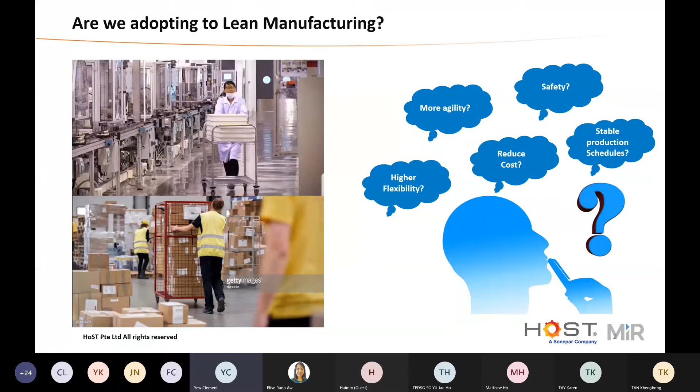And then we come into Industrial 4.0. We always talk about autonomous systems, collaborative systems where humans and robots or machines can coexist in the same workplace together, and coexist safely. Then also how flexible it can be, and add on to that is connectivity, because of all the data required to analyze how to better a process to make it more efficient, and thus the productivity increases.

For humans, what kind of data can be collected? Actually, to me, it's really minimum or nothing.

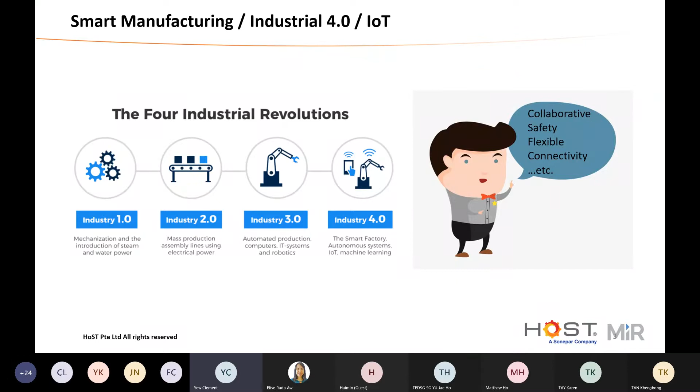Then comes the new norm. Because of the COVID situation, a lot of processes need to be changed. I can correlate these to some terminology used in Industrial 4.0. For example, autonomous system means less or no labor, no humans around. So it actually cultivates an environment where there is lesser kind of infection. And in cases where there are some processes that humans need to be involved, can we use a robot for certain processes in between so it becomes collaborative, and this also ensures some social distancing between humans?

Safety wise, using machines or robots in between also increases safety for the workforce, so that infection risk is brought to a very minimum probability.

Data analytics: if we go to any shopping mall, you need to do a safe entry. Similarly, by using robots or machines, data is collected and you're able to analyze this data as well. In terms of flexibility and scalability, a robot can be very flexible and scalable too.

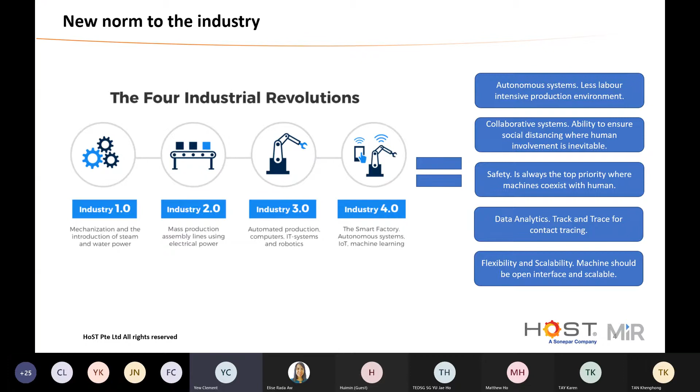That comes to why the topic of a better way, because for MiR, we are actually the world's leader in producing the safest and most reliable autonomous mobile robot. We focus on developing this robot in terms of collaboration and adaptability, because we don't want users to change their environment or infrastructure too much to use the robots. That doesn't make a lot of sense to us. And of course, performance as well, because performance is always the key indicator of whether the robot is justifiable or not.

Quick show: MiR 100, MiR 200, MiR 250, MiR 500, and MiR 1000. It has a payload ranging from 100 kilogram all the way to 1,000 kilogram. These are the members of the AMR MiR family.

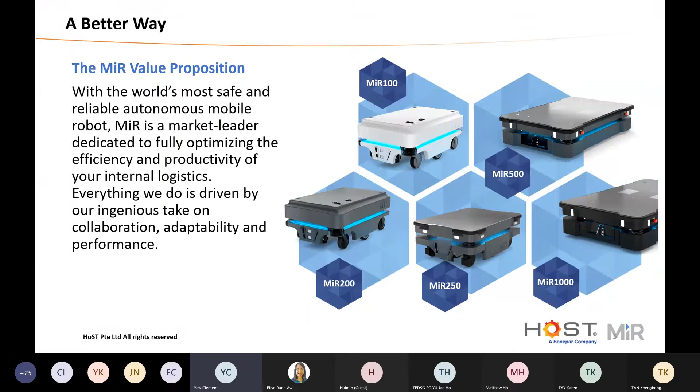A lot of people use the term AGV, Automatic Guided Vehicle. So what's the difference between AGV compared to AMR? An AGV is typically an older kind of technology which requires tracks such as magnetic strips on the floor or wires to guide the vehicle along. But for AMR, which MiR has developed, effectively we don't need any of these magnetic strips on the floor or wires.

For AGV, you will stop at any obstacle without the possibility to change the route, so you really need to remove the obstacle, otherwise you'll just get stuck there. Whereas for AMR, it's able to safely travel around people and obstacles and reach the destination required. It's also easier to expand AMR compared to AGV, because with AGV, if you want to change the route or expand, you probably need to physically change the magnetic line, which creates changes to your work environment. AMR doesn't need that. AMR is more flexible and navigates dynamically while planning its own path, whereas AGV is very restricted to what's on the floor, and very controlled as well.

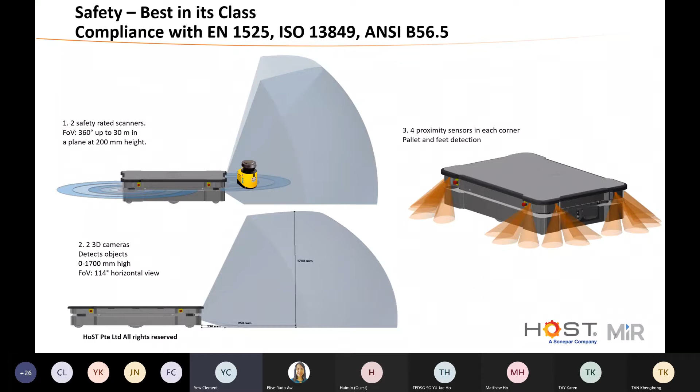But for MiR, we actually have solutions to that. We're able to build a conveyor to transport all these cassette boxes, and we're also able to integrate a robotic arm on top of our MiR for such processes as well.

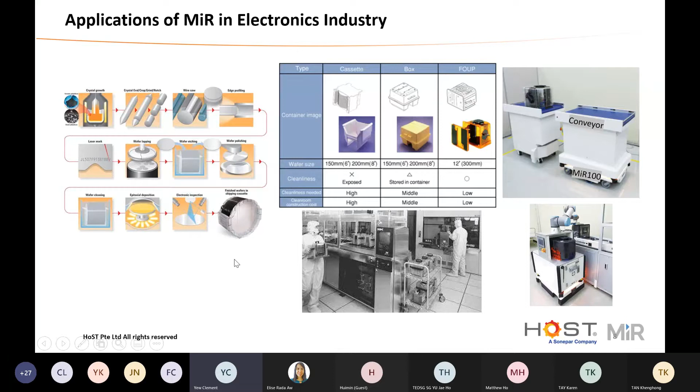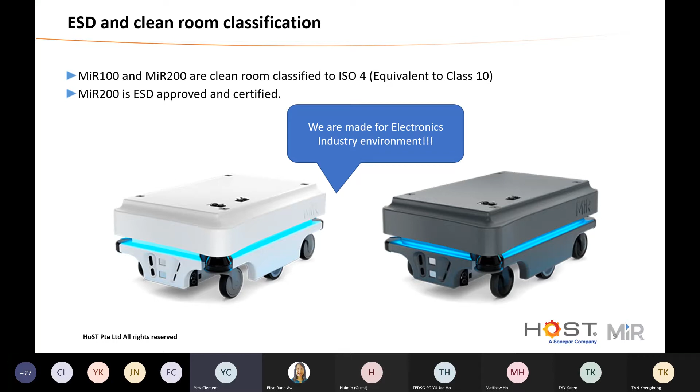For our MiR, we also know that for the electronics industry there are some requirements for the environment. So not to fear - MiR 100 and MiR 200 are actually clean room classified to ISO 4, which is equivalent to class 10. Our MiR 200, the gray one, is also ESD approved and certified. So essentially, these two models are really made for the electronic industry environment.

I'd just like to show you how the MiR works in a typical production environment. Please enjoy the video.

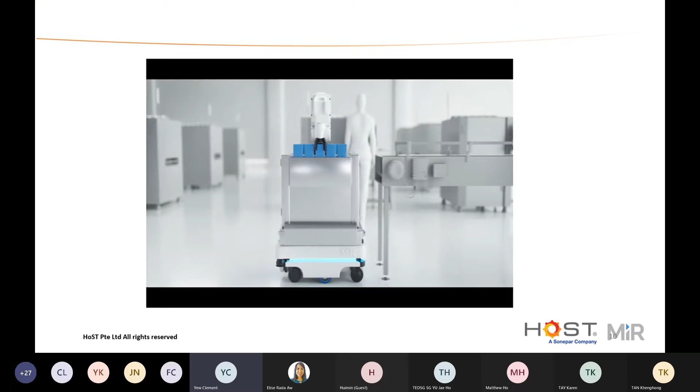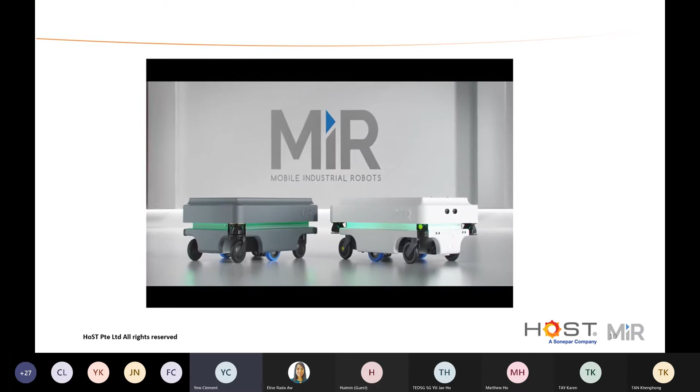Imagine a fleet of collaborative mobile robots that could optimize your workflow, increase productivity, and reduce costs. What if it was 100% automated and could collaborate with employees? And what if it was fast and easy to integrate into any type of factory layout? Sounds like something from the future, right? Actually, it isn't. Let me introduce you to Mobile Industrial Robots, MiR, an efficient and flexible mobile industrial robot solution.

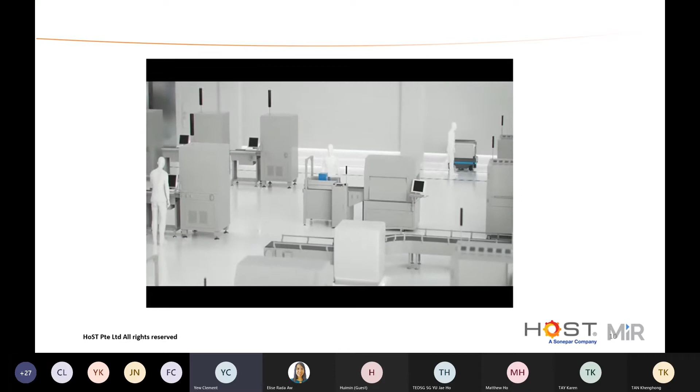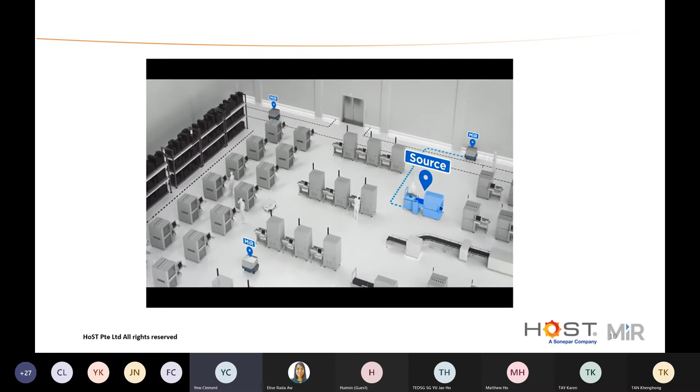So how exactly does the MiR fleet work? Let's have a look. An employee would like to send the item he's just finished working on to the next production line. With the press of a button, a MiR robot is summoned. A signal is sent to the MiR fleet management software, which runs behind the scenes and manages all the MiR robots. The system automatically instructs the appropriate robot to navigate to the source point.

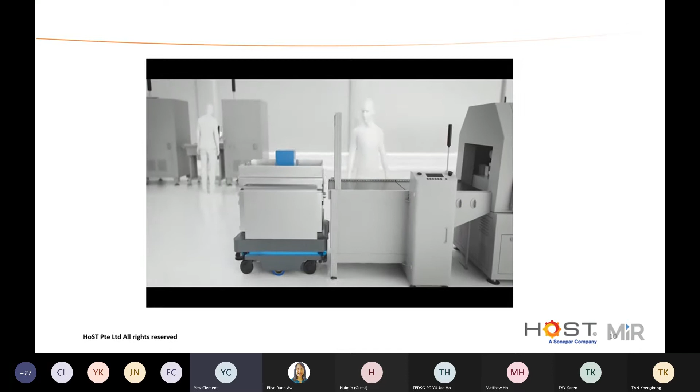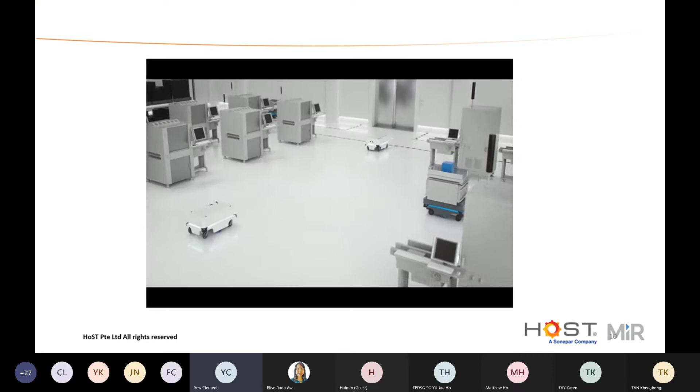The item is placed on the robot and is ready for transit to its destination. The robot drives 100% autonomously and can easily navigate around obstacles on its way. The fleet management software automatically adjusts traffic in real time, ensuring that everything runs smoothly and efficiently.

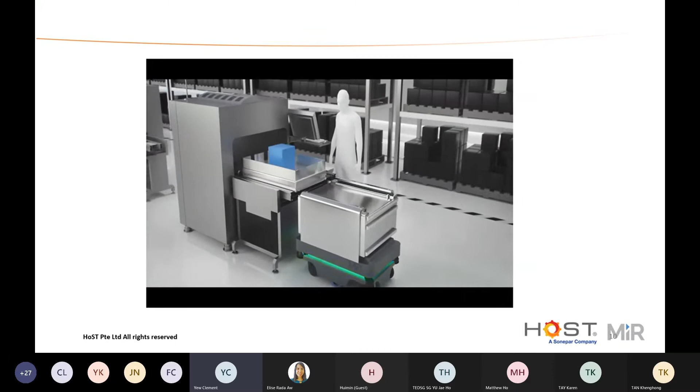Now the robot has delivered the item to its destination. If there's nothing else in the queue, the robot can be set up to automatically park in a preset parking spot and recharge. The robots can also be summoned via tablet, automatic communication from production lines, or via your ERP system. You even have the possibility to create rush orders that are placed in front of the order queue.

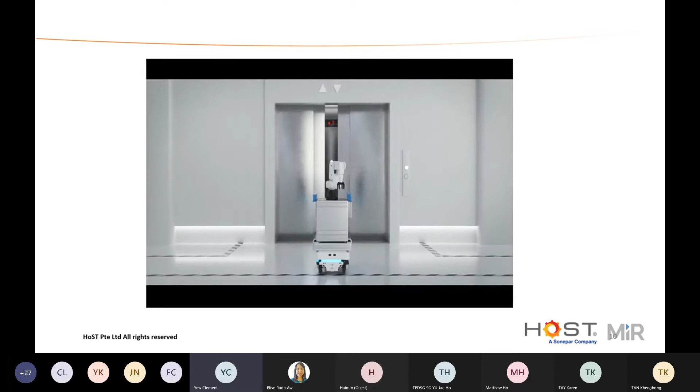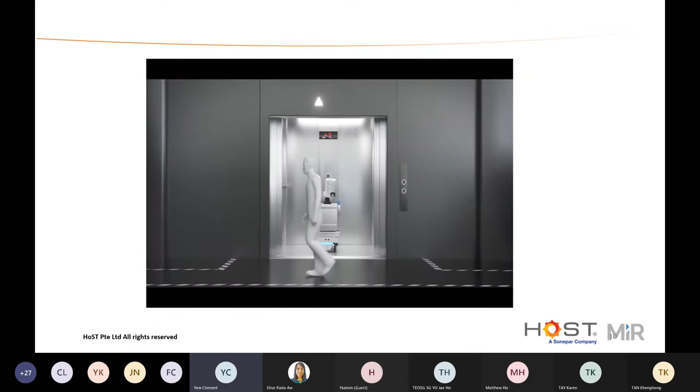Because the robots drive autonomously, they can perform complex maneuvers, such as navigating across multiple floors. If a robot encounters an obstacle that it can't navigate around, a notification is automatically sent to the user that an action is required.

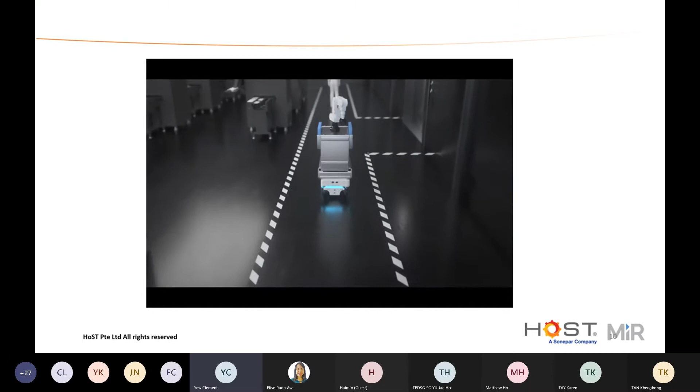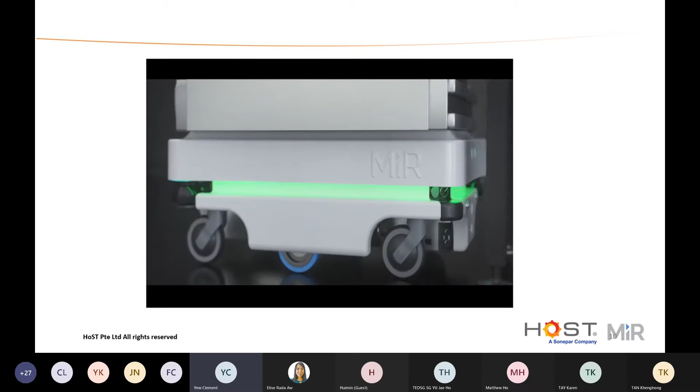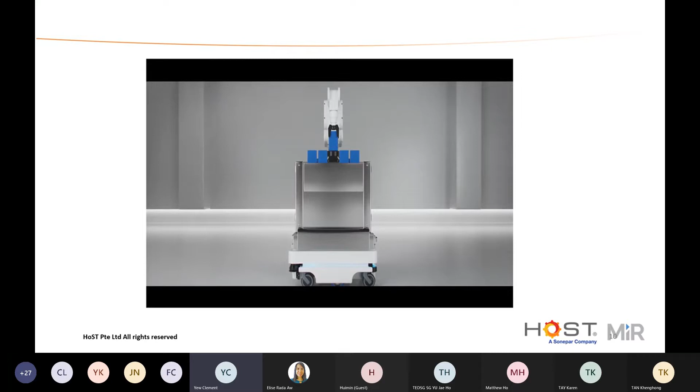When the item has reached its destination, the robot automatically sends a notification. The top modules are easy to change, so the robot can be redeployed for different tasks, whether transporting small, medium, or large items. We've got the solution to automate your internal transportation and logistics.

Programming the MiR robots is simple. The user-friendly and intuitive interface allows for fast and hassle-free implementation. And you get customizable dashboards that make it easy for you to tailor the interface to your individual needs.

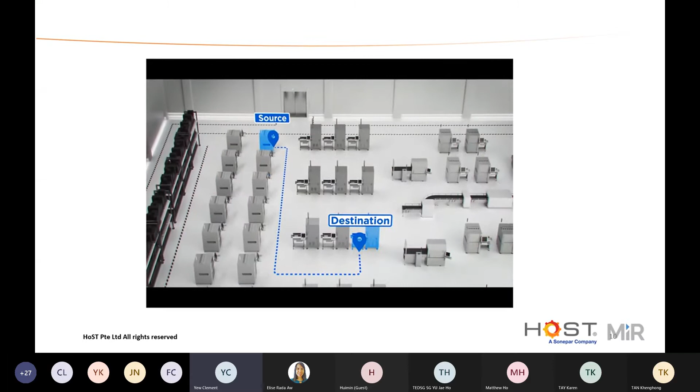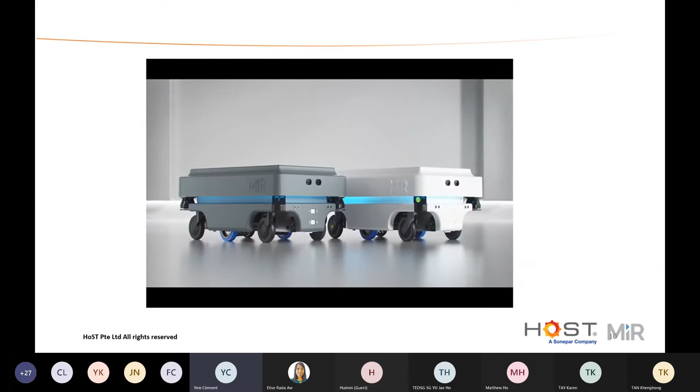At MiR, we know that factory layouts change rapidly. That's why we made it easy to reprogram routes. A few clicks and you're ready to go. It's that simple. MiR is one of the fastest growing companies in collaborative robotics. Our solutions are used all around the world and are helping companies to increase productivity, profitability, and to streamline workflows. Contact us today to learn more about how we can help automate your factory layout. MiR Robots.

Okay, so there's only so much we can show in terms of the animation. But to be honest, to date, we have tons and tons of applications under our belt. Flexibility is what we are really focusing on. As you can see, we can have multiple kinds of top modules built on top of our robots. We also have accessories like hooks for towing all the trolleys required, robotic arms as you have seen just now in the animation. We can also build basic shelves, conveyors, and pallets. So really, from a solution viewpoint, the sky is the limit.

Whatever is really what you required, and we can always discuss the solution behind it.

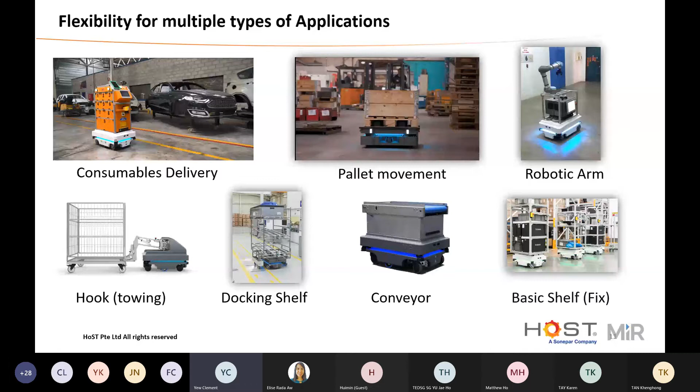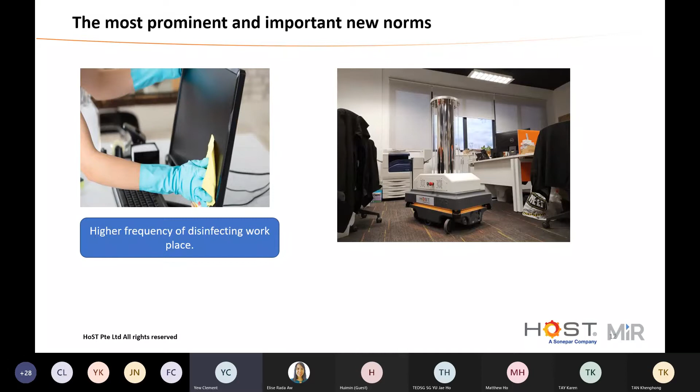And of course, the new norm also brings about disinfection. So now, in the workplace and in commercial spaces, a lot of disinfection work has been conducted. It requires a lot of labor because the frequency of disinfecting the place is getting very high. So therefore, MiR together with Host actually developed this solution. The disinfection robot is a UVC unit built on top of the AMR, so effectively this AMR can be programmed to disinfect your commercial space or workspace.

Animation is nice to see, but is it really workable in real life? We have several testimonies that I'd like to share with you guys via this video. Please enjoy.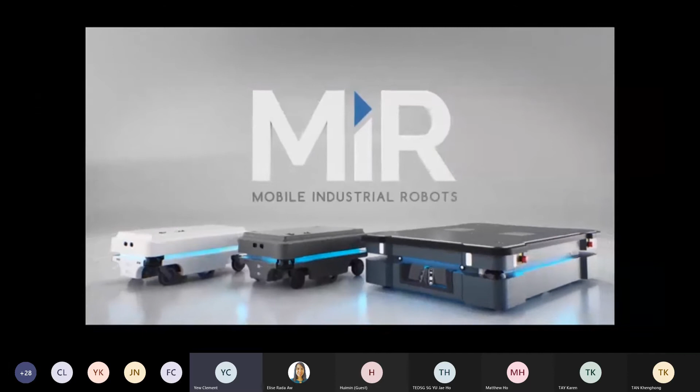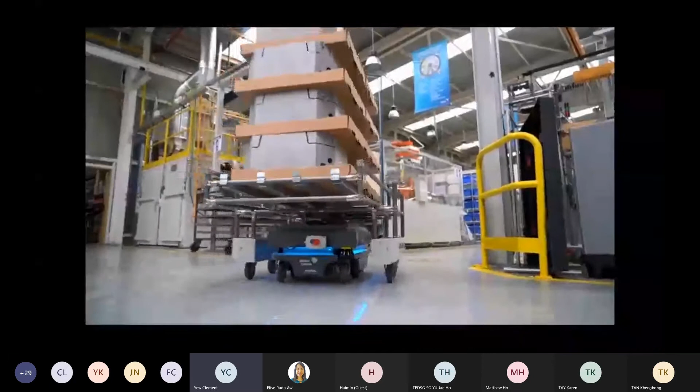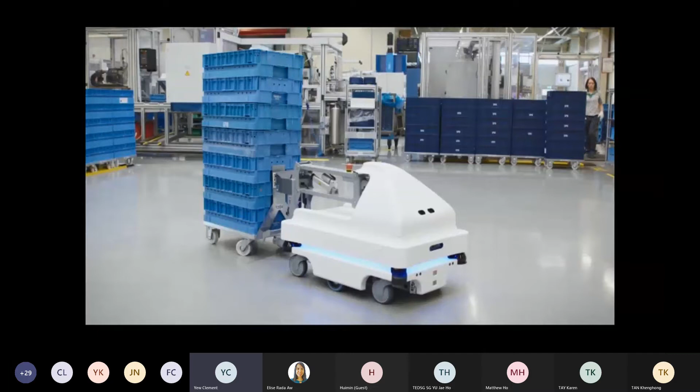The use of mobile robots enables us to implement these optimizations in order to improve our efficiency, productivity, and safety. Our MiR robot automates the transport of raw materials to one of our latest assembly lines. So we came across the mobile robots from Mobile Industrial Robots. They immediately convinced us with their great flexibility. Since then, Nidec APM has deployed 3 MiR100 robots. They autonomously transport material and empty containers between warehouse and assembly.

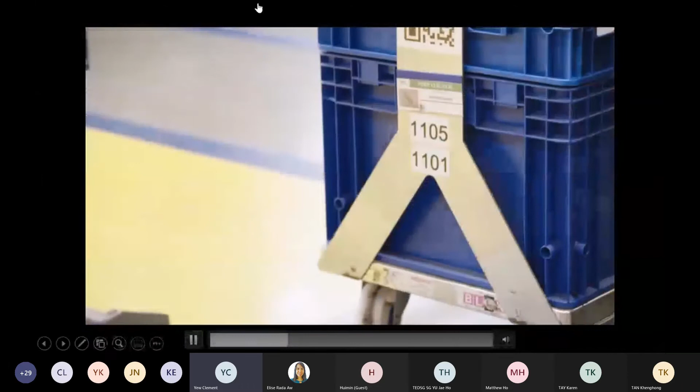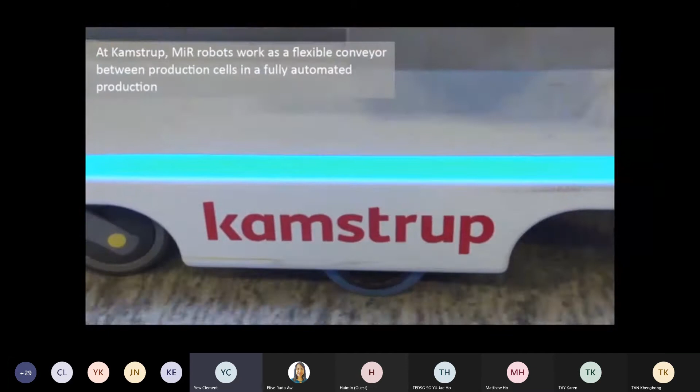We use MiR as a conveyor belt. We use it to transport our semi-finished products and our finished goods from production cell to production cell and from line to line. There are no people involved in producing the high-volume products. This means we are very dependent on the MiR being able to deliver items to a robot, which in turn can deliver items to the MiR.

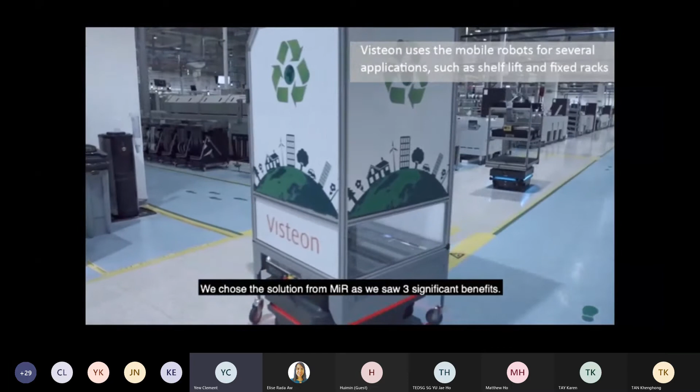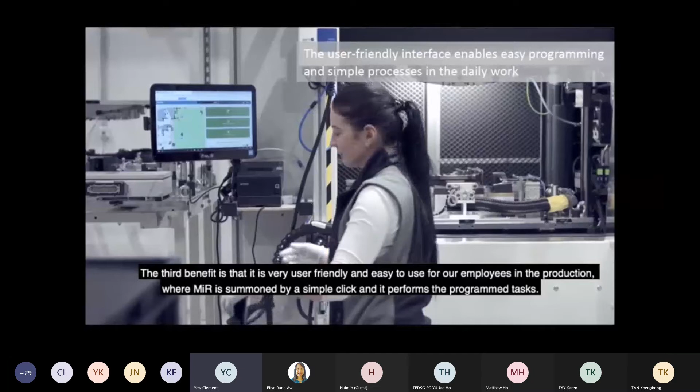We chose the solution from MiR as we saw three significant benefits. First of all, because of its high flexibility, the robots can be used in various production processes. Another benefit is the programming, which is easy and intuitive. This means we don't need a specially trained expert to use it. It can be managed by a regular employee. The third benefit is that it's very user-friendly and easy to use for our employees in production, where MiR is summoned by a simple click and it performs the programmed tasks.

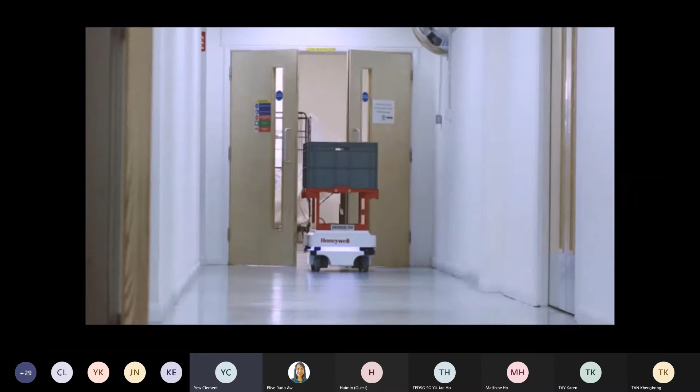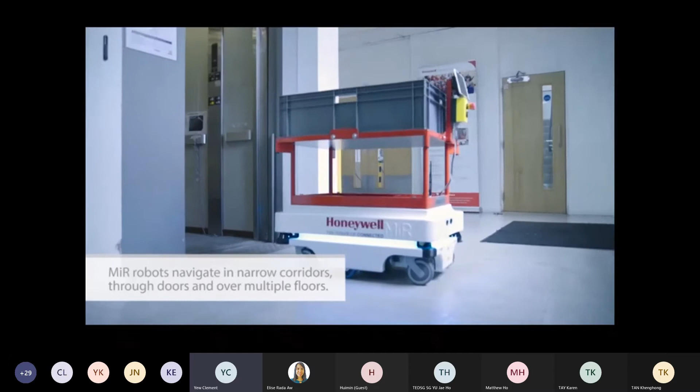It's really important for us to be able to have the robots automatically open the doors, which was done by a Bluetooth interface. We also needed to get the robots to be able to use the lift, so fleet controller and having the robots automatically control the lift was a really big thing for us.

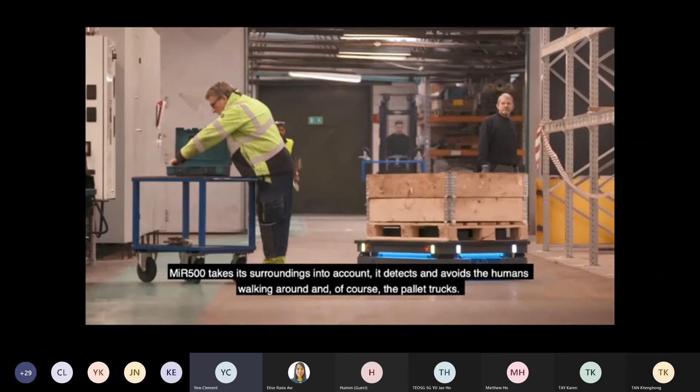It gives me an easier workday. And when talking safety, it is much more safe having the MiR500 drive instead of having me drive a pallet truck. This is especially regarding collision and other things that might happen because we drive so far. MiR500 takes its surroundings into account. It detects and avoids humans walking around, and of course the pallet trucks.

So these are all the testimonies from some use cases. We are also looking forward. There are already many use cases in Asia, just that Asians are more, let's say, shy at the moment. But I believe probably next year we will have a lot for Asians as well.

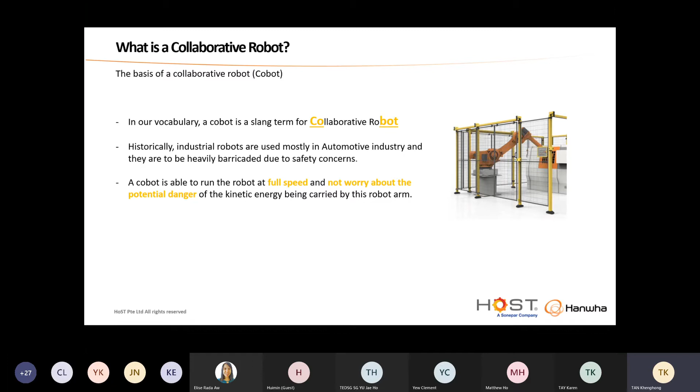Maybe I'll go through some history about collaborative robots, and I'll go through the applications. For collaborative robot, everyone just says it's a cobot. So how it came about is collaborative and robot, so people just, it's a slang and people call it collaborative cobot. Historically, all these robots have been used in the automotive lines, like for Ford or GMC, last time in the US. And all these industrial robots are very heavily fenced up due to safety concerns. So for a cobot, it's able to run at full speed, and you are not worried about any potential danger that it can cause harm to a human being.

So the history about cobots: in 1999 in Europe, there is a law that says you need to help all those operators into ergonomics, because there's a lot of musculoskeletal disease cases happening. So they first came out with a hydraulic kind of arm that helped assist the operators to move heavy loads. And later on, they added in some intelligence, put in some motorized parts, and it became a collaborative robot. So in 2004, all the big robot manufacturers first came out with all these different kinds of cobots to help out all these operators.

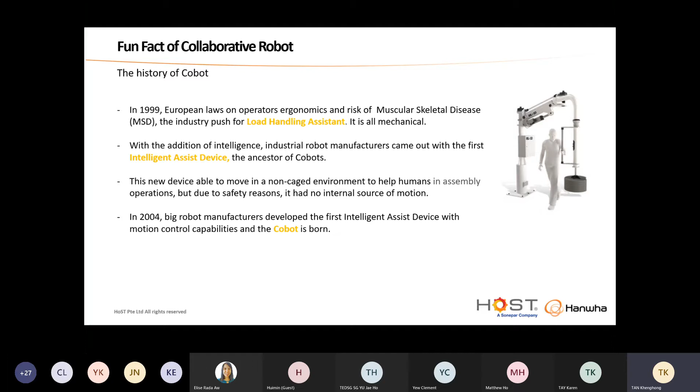So Hanwha itself is a Fortune Global 500 company. They started many years ago, and they are in many different kinds of industries like chemical, aerospace, mechatronics, and many more. So for Hanwha collaborative robotics, it's under the mechatronics division, and last year they achieved 61.9 billion USD of sales globally. They have more than 67 years of history, and there are many operating companies in the world doing many different things.

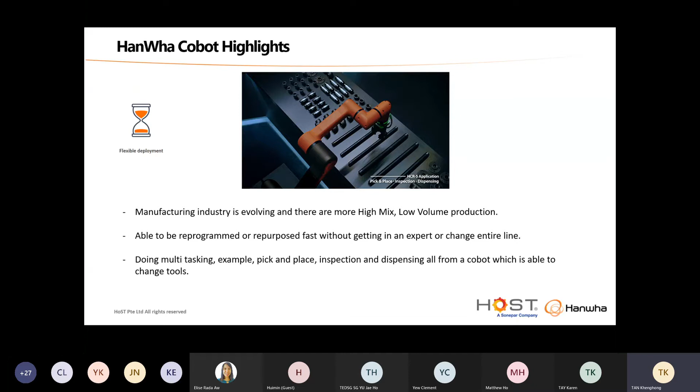Currently, cobots are able to do multitasking, like we can do a change of tools. You can do pick and place, inspection, dispensing of glue type applications, all on one robotic arm just by changing the end effector of the cobot.

Now let's talk about safety. I think this is very important because this robot is going to stand next to your operator. It can detect external collision, like just now in the video, when you just touch it with some force, it will actually stop the cobot.

Or we can put in a virtual safety fence, meaning the cobot will never pass this axis. This is a parameter setting that you set first, so it will be safe for your operators to stand right beside the cobot and work together. It achieved ISO 13849-1, Category 3, Performance Level D.

Talking about fast integration, on the wrist of the cobot arm there's an LED light, as you just saw. It can actually show the status of the cobot, whether it's e-stop, idle, or active, so this can be clearly seen.

There are I/O ports and also an EtherCAT port on the arm of the cobot, so it's very easy for you to put in a new end effector or program the end effector from there. You do not need to lay the cable all the way back to the control box.

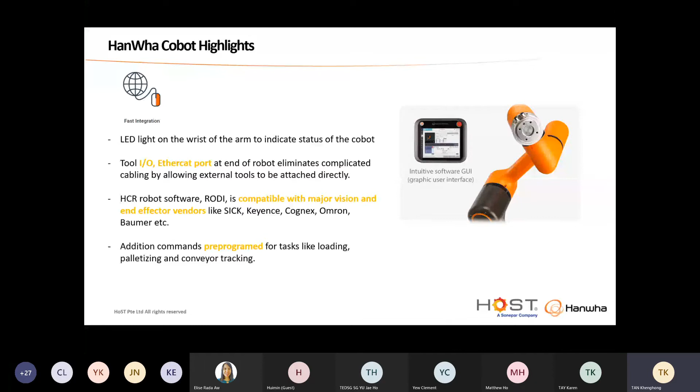Enhanced usability: you can actually teach this robot in just 1 minute for different locations. Let me play the video.

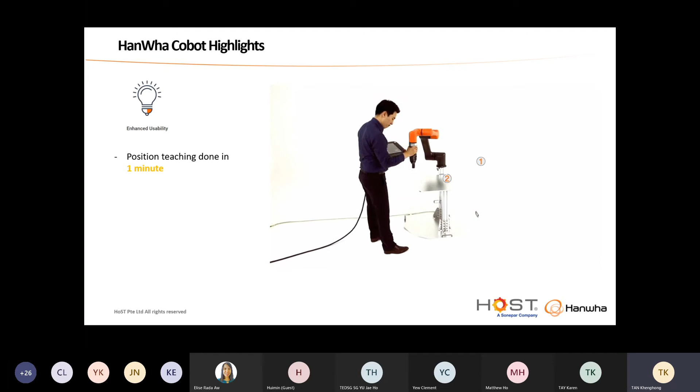Traditionally, people always need to set all the vectors for these robots, like position 1, 2, 3. Now you can just pull the cobot to the position you want, and it will be 95% there already. So later on, when you want to add in your applications or end effector setups, the programming will be so much faster.

Coming to applications, I think this is the most important one, because a robotic arm without any effector or purpose is actually useless. So let's talk about the applications.

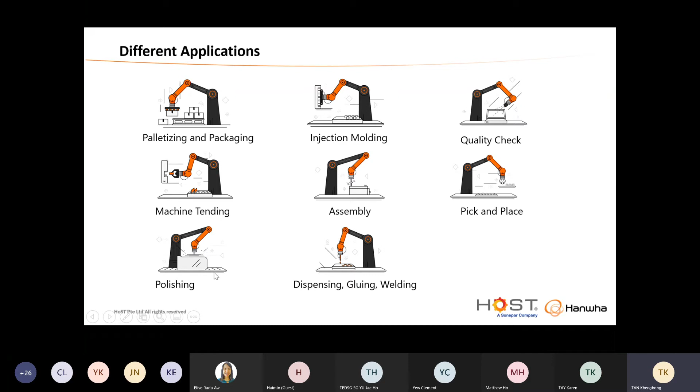Palletizing and packaging, so you can move packages onto pallets. Injection molding machines, it can be put beside to do injection molding. Quality checks using vision. Pick and place small items. We can do assembly like screwing. Machine tending, more for CNC machines, you can put in materials or take out materials. You can do polishing application, dispensing glue, and welding as well.

So this is a video of all the applications that we have done and can showcase. You can look at all these applications and think about how this might apply to your own plant, or if you have any applications in mind.

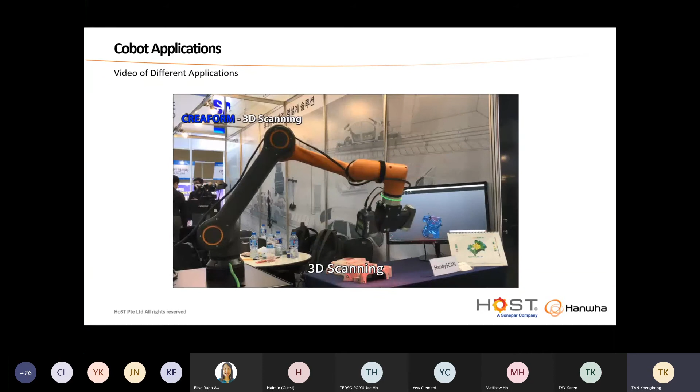So you can see that they can actually be a barista as well. In Singapore recently there's a place that opened up, and they are using cobots to make coffee and also cocktails.

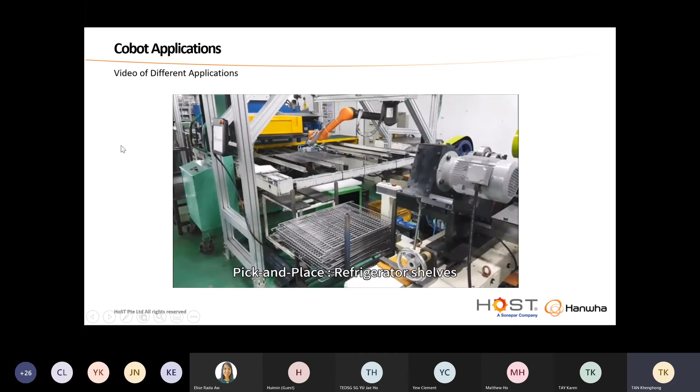So this is an application I also wanted to stress: working together with a MiR base and a collaborative robot top to do different kinds of applications. It uses a SICK vision camera to do pick and place for the different tubes that it's going to pick up later.

You can see from the video. Just fair warning that this video is not very well taken, because it is a proof of concept at our customer site.

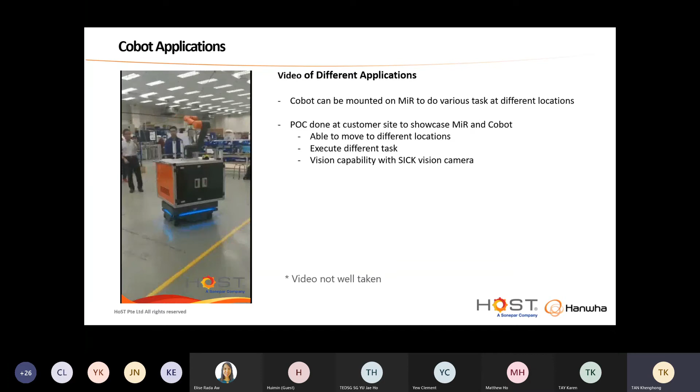So you can see that the cobot together with the MiR is able to move to different locations. Actually you can see there's a plank on the floor and a slope, so the customer wanted to test that it can go through a certain different kind of elevation.

In this application, they use the vision camera to check different samples, and they pick up a tube to take a sample of what's in a tank. After that, it's supposed to spread some materials.

Let me fast forward a little.

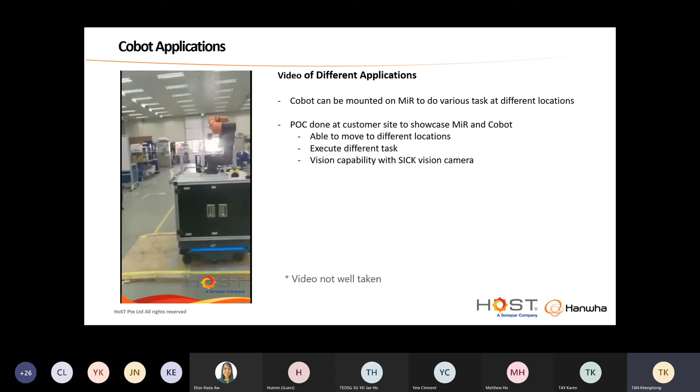So actually for robotics, the kind of different applications is endless. Maybe you can talk to us if you have anything in mind that you want to try out, do let us know. I'll hand it back over to Karen or Elise.